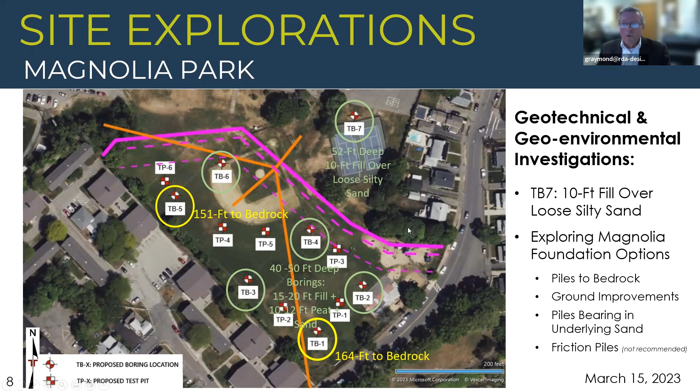But as far as the preliminary pricing we're doing right now, we have to assume that this is going to be treated as floodplain, which again means we have to end up raising the building and dealing with a whole bunch of complications, which is fine. I'm going to show you some budget numbers—we've accounted for it, but it does raise the price.

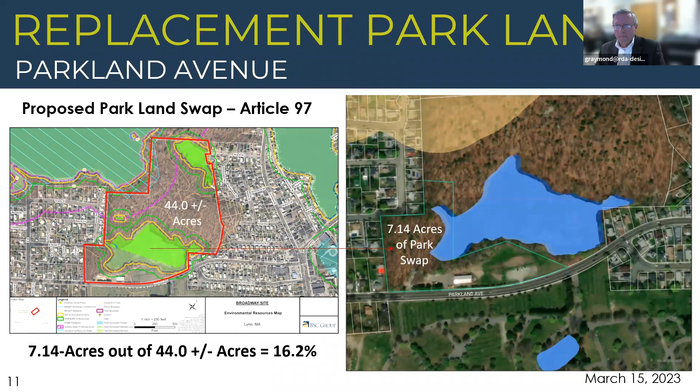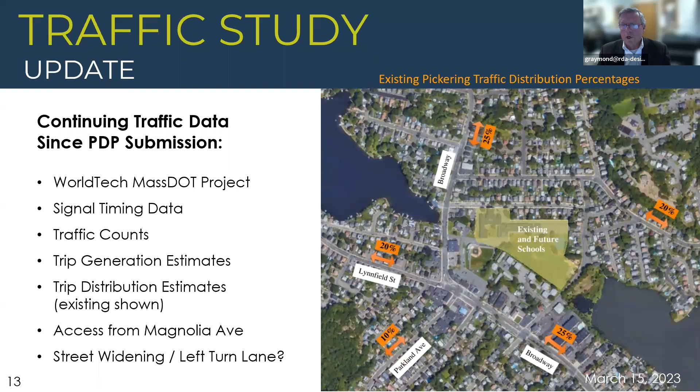So the MSBA, the next submission is due at the end of April. Part of that submission is you have to have a code upgrade. What happens if you just bring the existing building up to code? What happens if you do an addition/renovation? And what happens if you do a new building? So we have those all covered.

We actually have 3 addition/renovations that I'll go through quickly with you tonight. We do have to have professional cost estimators go out — the OPM, Lynn's group, will have one, and we'll have one, and the prices will be reconciled. So these prices have been developed kind of in-house, and they may change. I just want people to know they may change depending when the professional estimators give us their opinion.

The code upgrade is for informational purposes only. It doesn't meet the educational program. MSBA knows it doesn't, MSBA will not fund it, but they do want the city to have that data — that even if you just brought the existing Pickering up to current codes, we think it would be about $76 million.

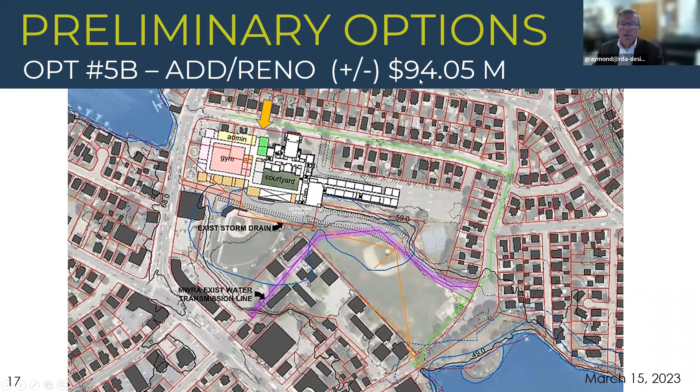Then you've seen this before. We've modified it to match the MSBA program. We added in the locker rooms and the toilet rooms for the community wing. So this is on the Magnolia. This is the MWRA line. So we know we can build in here, not impact that. Of course, we have all the other issues.

So we have added the locker rooms in. We've made the movement studios larger. We have toilet rooms for the public, but otherwise we made the science labs bigger, but otherwise it's the same layout you saw last time.

We have the 4-story wing, which is pretty much classrooms. We have the community wing, which is the gymnasium and the cafeteria. And in this option, it's nice because you have a 2-story addition kind of along Magnolia, with all the other low buildings. The entrance has to be over here because we need to bring parents in around the building and then let their kids off or pick them up on the passenger side.

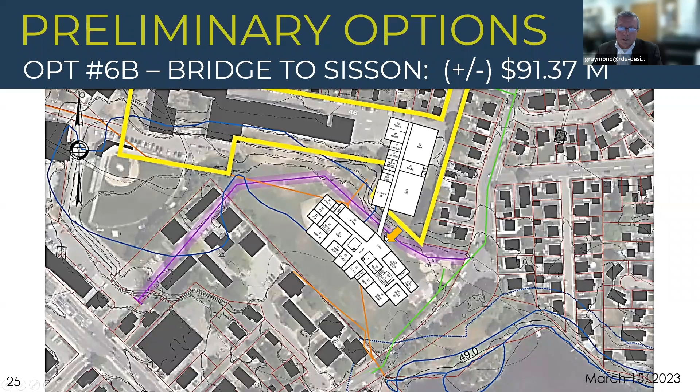The other one has a smaller footprint, right? Because we've taken this wing that was along Magnolia, and we've put it up on the Sisson Plateau. The tennis courts are under here, the pavement is here, and we have this bridge that goes over the MWRA line. And this is doable. The entrance is on the same side of the building. We've laid out the exact program. We have the movement studios, the locker rooms, all the stuff that's in the program. This too, as I mentioned earlier, is about 91 million.

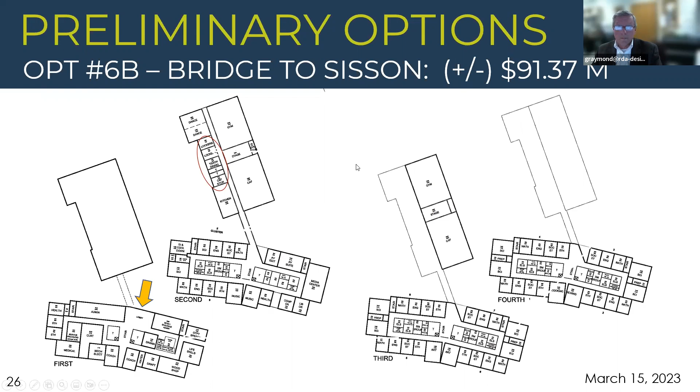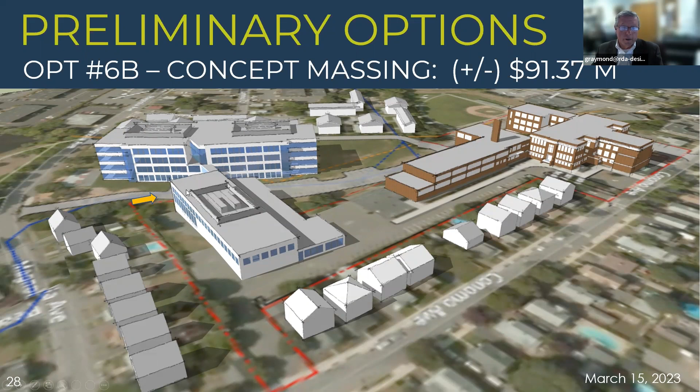It would look like this, right? You'd have this bridge, kind of like the ones that you see at Logan Airport. We'd have big trusses and a glass link. This is pretty much 4 stories of classroom and administration. We did put the cafeteria up in this area so that it might have a view out to Flax Pond, and then the gymnasium is back in here. So this is what it would look like above Conomo Ave, kind of taking a look at it. Again, the entrance you can't see, but it's down at the first level. And then this is just another view.

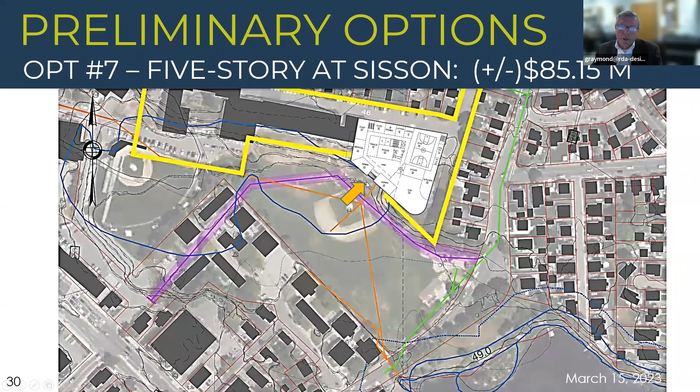So those two, both around 91 million city share. And as I said, we kind of resurrected one we had looked at before, which completely avoids Magnolia Park, right? We have a more compact floor plan because it's 5 stories, not 4, but it is dug into the hillside. So just like Thurgood Marshall, up on the Sisson Plateau, it's going to be 4 stories tall. And on this side, where it's got a lot of breathing room, it's 5 stories. But the entrance is here, and that is going to help in a couple different ways. I'll show you.

Jean, can you let Brian Castellanos in? I don't see him. No, I'm sorry, he's... wait, here. Councilman Lozey? I did admit him, so I'm not sure what happened, Lynn. Okay.

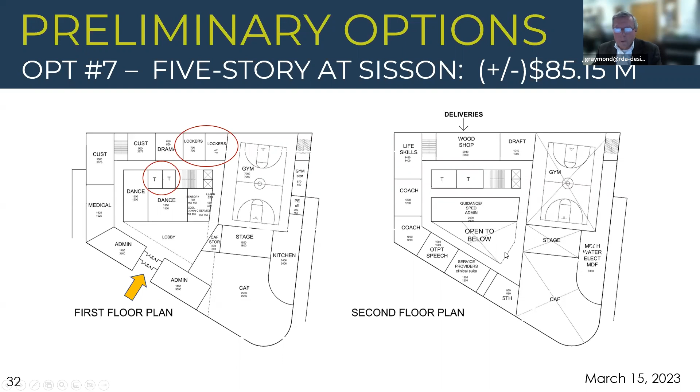I don't want to go through all the floor plans, but happy to if anyone has questions. We have the gym, stage, CAF combination. We have the locker rooms, the drama, the toilet rooms. So this is kind of the community floor that could be segregated. And then we have a floor above, and then 3 more floors where we have all the academics and clusters.

So this is an image that we've updated from where we were back in 2018, but we've added this upper floor. But as I say, from Sisson and Conomo, it's really a 4-story building because the lower floor is kind of like a walkout basement onto the park.

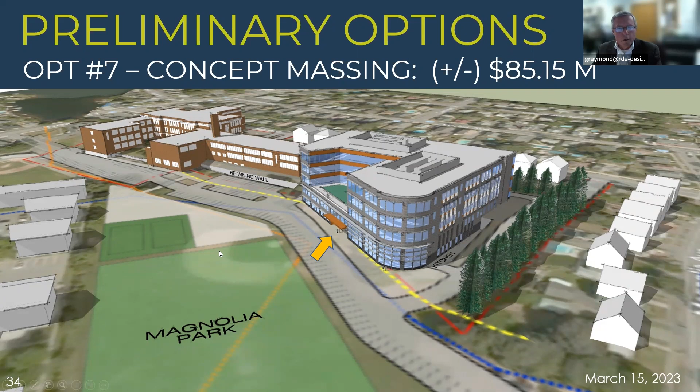This is above Conomo. Looking at it, in my mind, we would want to try to leave a planting zone just to, I don't know, respect the neighbors to the extent possible.

But I do want to say, when you go down the street at Thurgood Marshall, that is a 4-story building, and there are houses right across the street. And the way we've treated that building was with light colored panels, and I've always been very happy with the way it turned out. It just does not loom over the neighbors.

So the other thing about this is, if you're anywhere in this building, the most you would have to go down to get out is 4 stories. So even if you're on the 5th floor, you only have to come down, just like Thurgood Marshall, 4 stories, and you can get out at the Sisson Plateau.

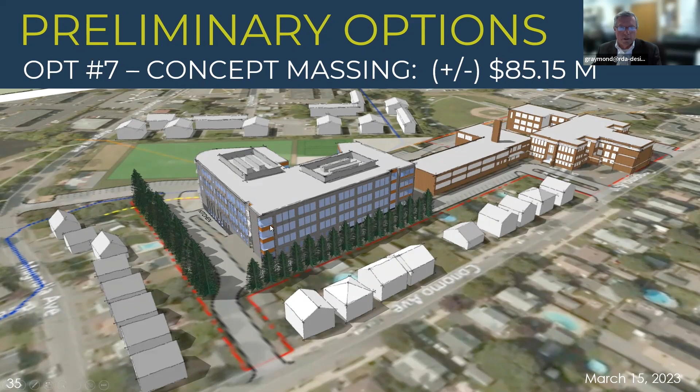So. Excuse me, I have a question. My name is Jane Franklin, and I'm the principal at Sisson School.

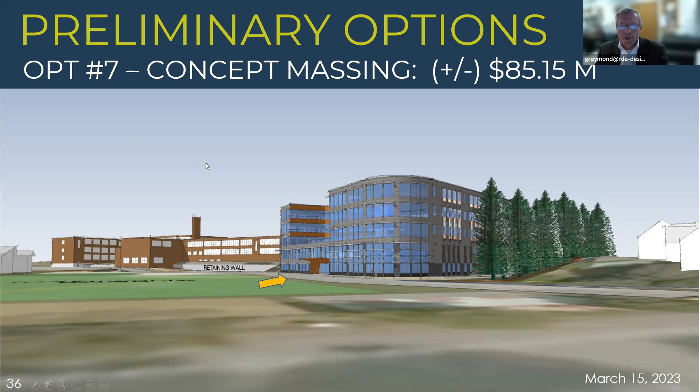Oh, sorry, I was trying to find you. I have a question - are you eliminating the portables that are at Sisson? Oh, thank you for mentioning that, Jane. Yes, oh, so I'm going to blow this up a little bit.

Okay, so we do need this footprint, right? Maybe we can bring it a little more to the right, but like I say, I was trying to create a planting buffer. This red rectangle right here are the 4 Sisson modulars. Whether they get replaced somewhere or relocated, they are kind of old, so I don't know if we can relocate them. That's one option, and maybe they go in the courtyard and connect to Sisson.

The other thing I had mentioned, just as a temporary measure for the 2 years it's going to take to construct this - though I know it impacts the drama program - we could more cost effectively remove the chairs in the auditorium and frame in a floor. So when you came from the corridor, you're just walking on a floor that's level with the stage. And I know we could create 4 classrooms in the auditorium if the modulars didn't work out for some reason.

Tom Mannion is asking to come in.

But Jane, I mean, you're very perceptive, right? We do need that footprint. And then there's 2 classrooms that are part of the permanent Sisson, but they're only 1 story high, not 2 stories. So we had shown them coming down also to get some breathing room here. But depending where this footprint ends up, maybe we don't have to take them down.

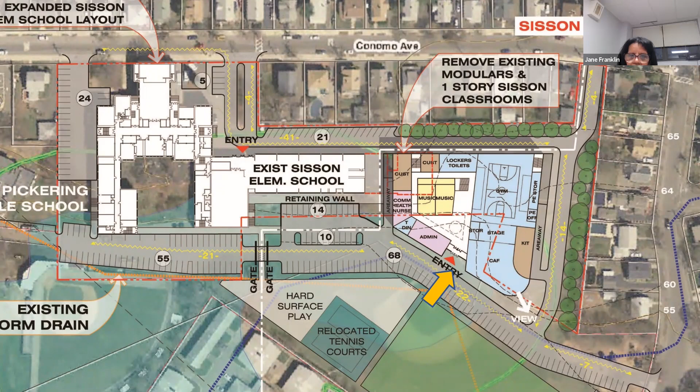We don't have all the solutions. There's always a process you have to go through, like how are people going to live through this? Maybe it becomes modulars or maybe it's something else, but I can say with all sincerity that there is a way to build this and maintain the function of what you have right now. Because if anything, I would like to add rooms rather than take rooms away.

Understandable. All right, thank you. You're welcome.

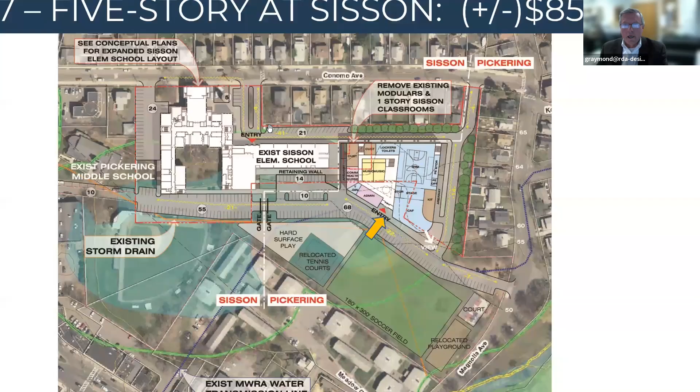I think that's kind of where we landed once we started figuring out all the cost and really, frankly, the financial risks. Even if we think we have it nailed down, we don't know what's going to happen. So we kind of like this as a recommended option. It also happens to be, it looks like it's about $6 million cheaper for the city.

But I really like this idea because we're away from the floodplain. It'll be a good solid building. And that's all I had to say. I think it just has a lot less risk associated with it.

Gene, are you carrying money for the unsuitable soils, like an allowance in your estimate for the Magnolia site? We were, yes. We were carrying 1.5 to about $3 million just to haul the stuff away, Tim.

But there's a chance that it could go higher, right? Yeah, that's the problem. We don't know. We don't have a report back. And even if we get a report back, we're not sure how precise it's going to be with how much we're actually going to have to take out at the end of the day.

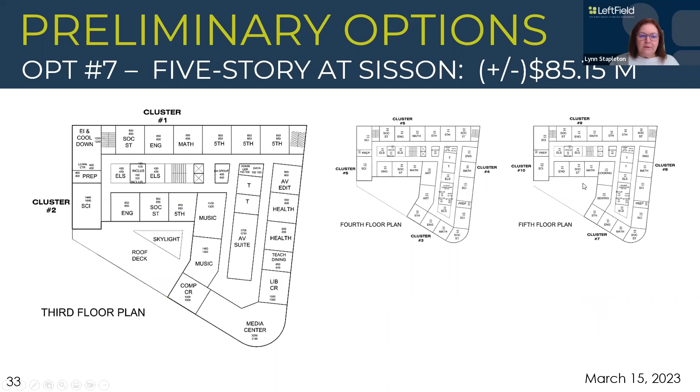So just wanted to quickly run through the meetings that we have proposed for the remainder of the preferred schematic report and then into the schematic design process. I have highlighted here, we're having 2 meetings in March and 2 meetings in April. And I think that will help us get to the submission date of the PSR, which is April 27th.

We've gone over the alternatives that we have tonight. We'd like for you to make a decision on what you prefer as the option to move forward with as the preferred option at the March 29th meeting. And then we'll be asking you to review cost on April 10th and to vote to approve the draft PSR for submission at the April 24th meeting.

And then we will take any comments that are received, wrap that up, and submit the PSR at the April 27th meeting. From that point, it goes to MSBA, and we'll have to go through a facilities assessment review with MSBA, and then they will vote at their June 21st Board of Directors meeting to approve the PSR, which gives us the green light to move into the schematic design process.

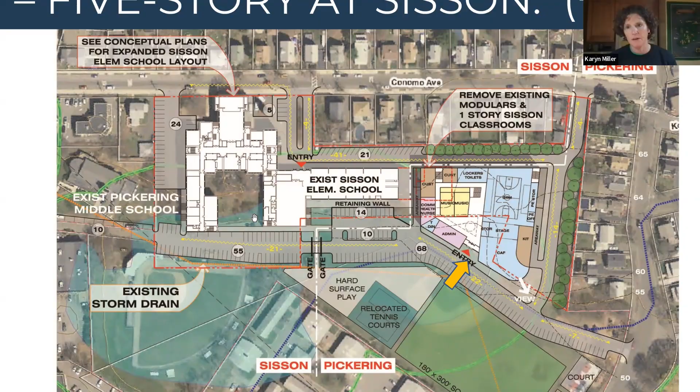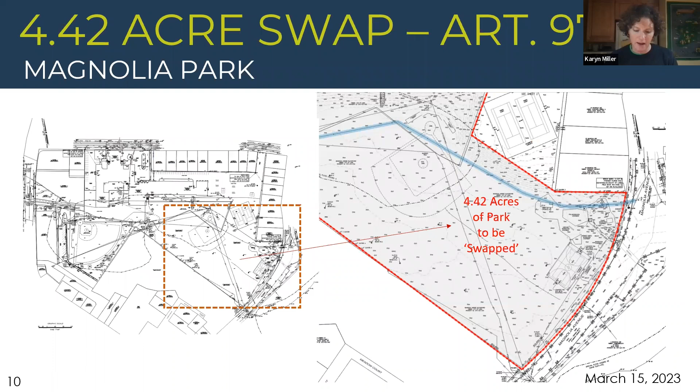So I wanted to go back to that FEMA document for the floodplain. If that were the case, I understand the city would kind of need to agree that that would also be floodplain. If that were to happen, how would that affect that hardscape play space that would be replaced for Sisson, and really for that matter, the parking lot?

It actually works out well, because parking lots and play areas can be flooded, and when the flood waters recede, you don't have any damage to a building, and you don't have to worry about getting to the building when it is flooded. Okay, yeah, thank you.

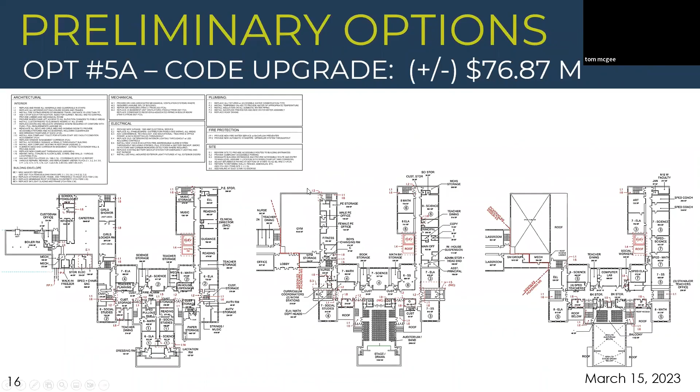I think that left Mayor McGee. Thank you, a couple of things. I think Rick made a really good point related to the modulars, and I think you laid out that there's an opportunity to really take care of those classes separate from the modulars.

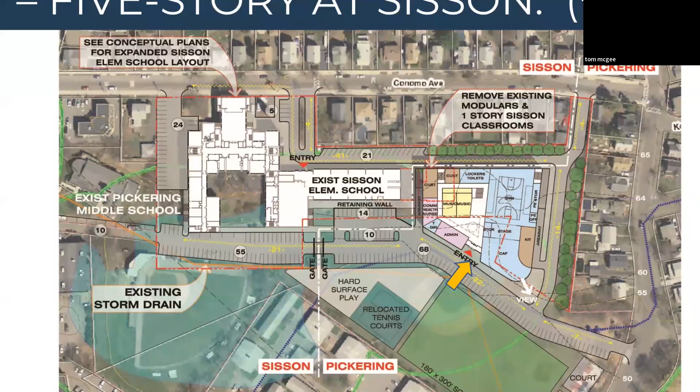So I think it's a great point, but I think Gene, you really laid out an opportunity to maybe make Sisson expand out in a way that connects right to Sisson and works, and maybe allow the modulars to be taken, since there's definitely space, as the mayor, the council, and the school committee know, there's definitely space needs throughout the city. Secondly, related to the last point I think Karyn made about the parking piece, there's definitely a lot of parking that goes on there.

So I think the key would be with the parking and in terms of the traffic issues, there's an opportunity to alleviate the traffic, particularly with Pickering going to be a much bigger student population than is at Sisson down below. And it alleviates at least some of the challenge related to the park.

The park taking creates an opportunity for a soccer field, tennis courts, as well as hard play surface. So there's a lot of positives, but I think the point I really wanted to make was it allows us, hopefully, to take a really serious look at alleviating the traffic on Conomo and really making a flow of traffic, bus...

Student drop off in that lower location, directly related to the new school up above, that maybe makes a real opportunity for us to deal with what's been an ongoing discussion about what the traffic is going to look like, how it's going to impact the neighborhood.

So it seems to me there's better opportunities taking the field below to address both keeping some of the parkland as well as parking, and maybe really making an opportunity for getting the drop off the streets and into a substantially larger area than is happening right now. So I don't know if that's a question or a point for discussion, but just some of those points that I think are important as we move forward on this.

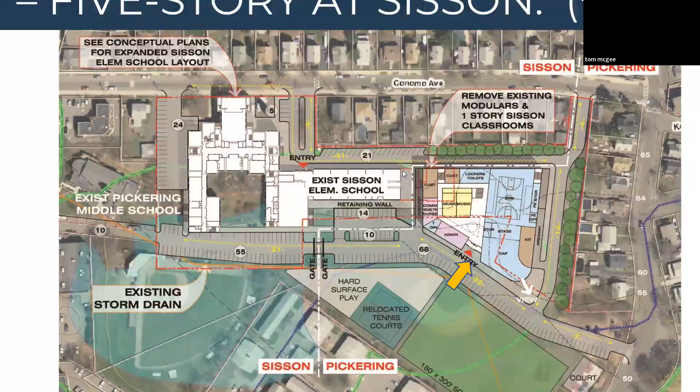I know we talked about it. So we're preserving the field, we're preserving some hard play area as well as the tennis courts. And there's an opportunity across the street to enhance some of that area being taken up by the soccer field. There definitely is space over there on the pond to create a really cool space for young people with the kind of playground that would take over what we're currently taking over in the current space.

A couple other people have raised their hand. I guess, Tom, I saw yours first. I think you're muted, Tom. Sorry, no problem, I'm still working on this thing.

I just want to say, having worked in the construction business as an electrician, Gene, this whole project, where you're putting it right now, makes total sense for everybody in that neighborhood, especially other elderly people living next door. If you're going to try and run 160-foot piles down day after day, probably for months, this whole thing I'm in total favor for. It's a great plan, I believe. It's awesome. And I just wanted to say this is well done. That's all I have to say.

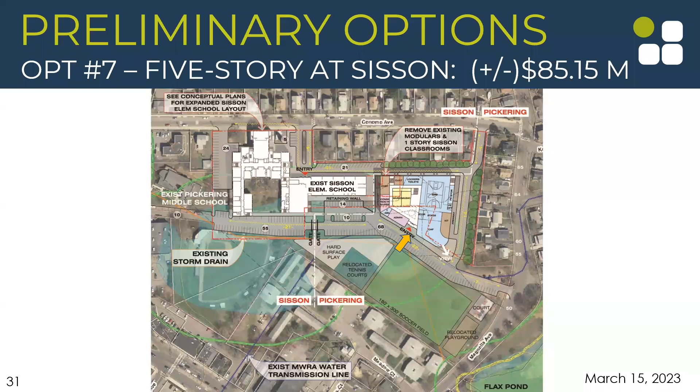Yes, it does. The city would be required to provide compensatory flood storage for anywhere they filled in. So yes, there would have to be a study on that, but I think it's going to be quite the challenge to find any kind of—you're mentioning on the plan an existing storm drain, but that wouldn't provide storm drainage for most of that parking going towards Magnolia. Correct, and that's something I'd like to see further. Yeah, definitely. Thank you. You're welcome.

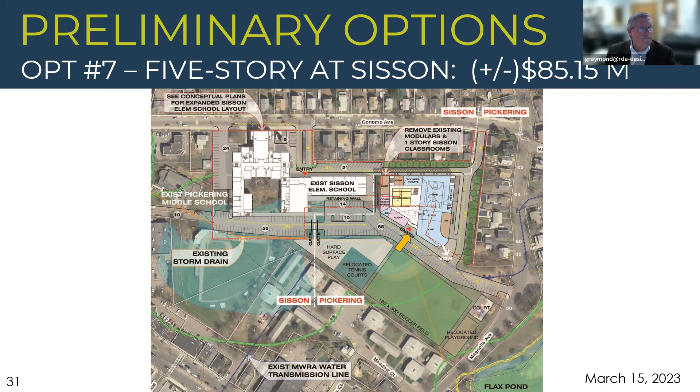Any other questions or comments?

I just want to thank everyone for the excellent comments and questions tonight, and thank the project team for pushing to think creatively to address these issues and reacting to the information as it comes up, positioning ourselves well and helping us think through the cost implications. I want to be transparent that we continue to have issues with the cost regarding the city's ability to afford the share of even option 7.

I mentioned on the last call that we are working with the state delegation to approach the state, to make clear what our ask is and what's necessary for us to move forward on this project with this timeline. We've gotten some good feedback so far, but we still have a lot of work to do. We've been communicating with other communities in a similar position with this jump in construction costs, and I've gotten good feedback from them showing this isn't just us facing this, but we'll need to continue that advocacy to stay on track.